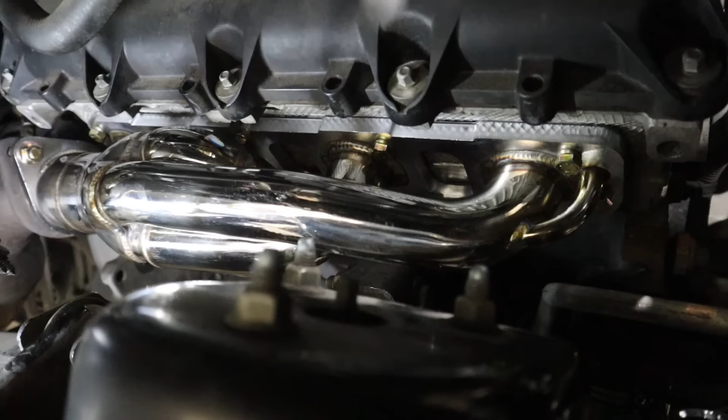In our last episode you saw that I took care of the exhaust leaks these vehicles have by installing a set of aftermarket shorty headers. In this episode, as you already saw in the thumbnail, we're installing a high volume oil pump and we're going to be doing an MDS delete.

Something that's kind of crazy to me is that it's been over 4 years since I first made a video about adding a high volume pump to a Hemi engine to help with these lifter issues. Since then, I've made a number of other videos doing as much research as I can, giving you guys accurate and up-to-date information about why I think this is a beneficial modification. It feels like it's come full circle—most people out there have heard of this as a mod to do for their engine.

One of the most hilarious things to me is that oftentimes on my own videos, I'll get people commenting and telling me, hey, you need to add a high volume pump to that Hemi engine. I think it's kind of funny how that works.

If you want much more detailed information on why I feel these high volume oil pumps are a beneficial modification to make to your Hemi, go ahead and watch the video I'll link in the description down below. It'll explain it much more clearly.

As a quick primer, I realized a number of years ago that a lot of these vehicles I was doing cam and lifter repairs on had extended idle times—fleet type vehicles or police vehicles where they're just sitting idling all the time. The way the oil pumps work on these engines, the least oil flow you're going to get through the engine is at idle. So you spend a bunch of time there, and it seemed like it was really affecting these vehicles.

So my thought process was, hey, if we can force some additional oil flow through the engine at idle, that can be nothing but beneficial. That was kind of the basis for that. But again, watch that other video if you want much more information about it.

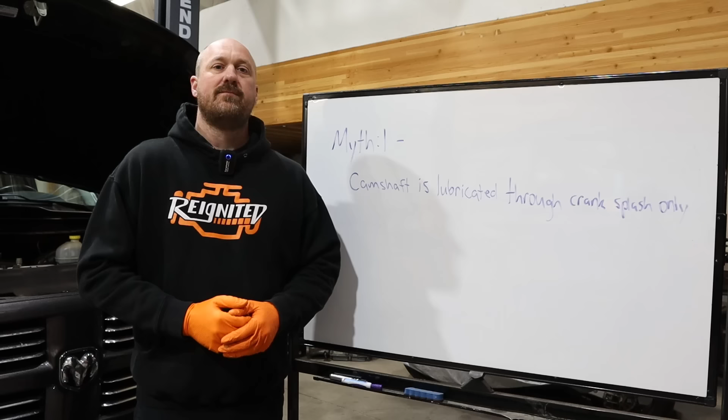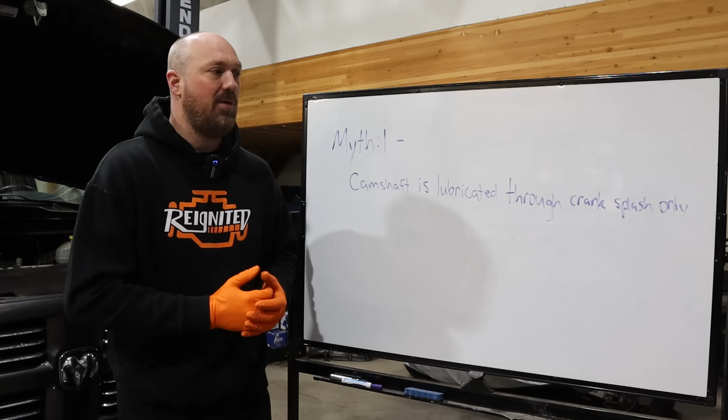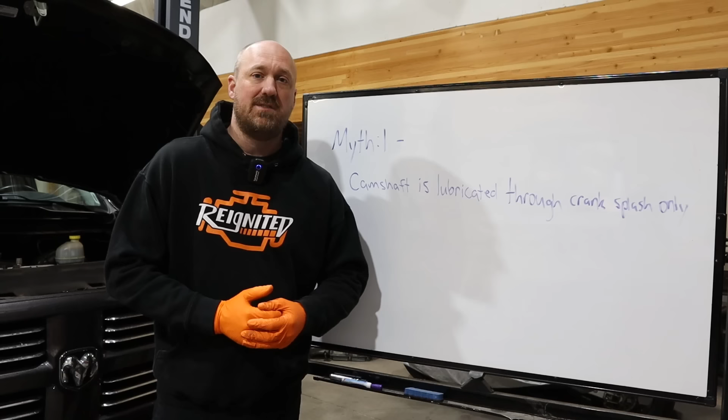Quickly I want to cover just a few common misconceptions or myths about this system. Myth number one: the camshaft is lubricated through crank splash only. That was a common one going around for a while, and that is absolutely not true. The Gen-3 Hemi engine has drilled oil passageways that provide pressurized oil directly to the lifter bores and thus to the cam lobes themselves. It is not reliant on crank splash.

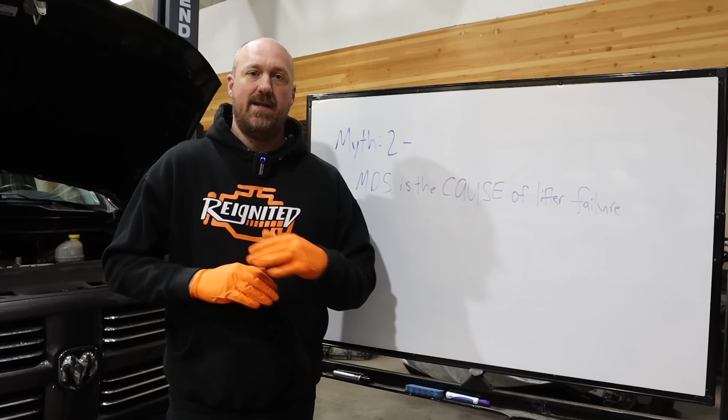Myth number two: MDS is the cause of lifter failure. I'm on record in multiple videos saying I do not believe this is true, even a little bit. A lot of people are convinced this is the case, saying it's always the MDS lifters that are failing. Number one, that is not true—my research has not borne that out. Number two, even on manual transmission vehicles, even my own that didn't have MDS at all, they were still experiencing lifter failure. So MDS, guys, is not the cause of this lifter failure.

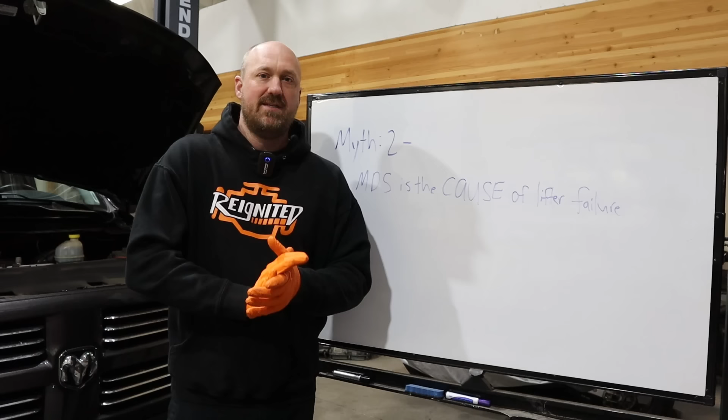That's why I say it's not critical that you delete the MDS in your vehicle, but it is appropriate in certain scenarios, like we're going to talk about later with this vehicle.

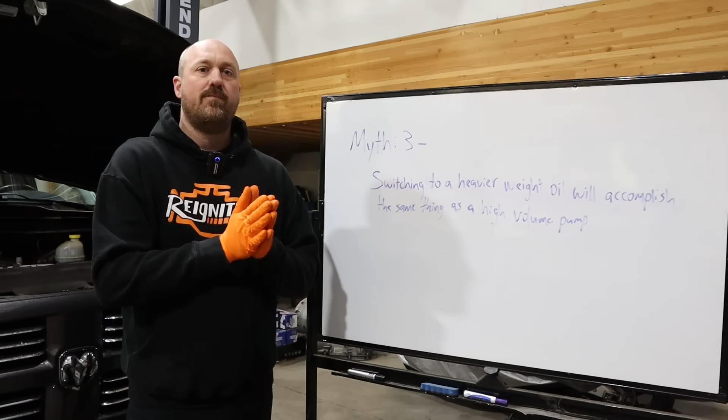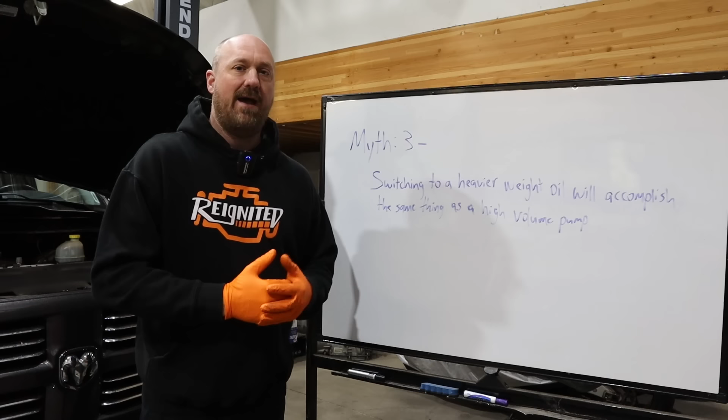Myth number three: people will tell me that switching to a heavier weight oil accomplishes the same thing as putting on a high volume pump because your pressure goes up. To understand why this is a myth, we need to understand what we're actually trying to accomplish. The pressure number increasing is simply a byproduct of the high volume pump—it's not what we're actually after. Pressure is simply a reflection of resistance to flow.

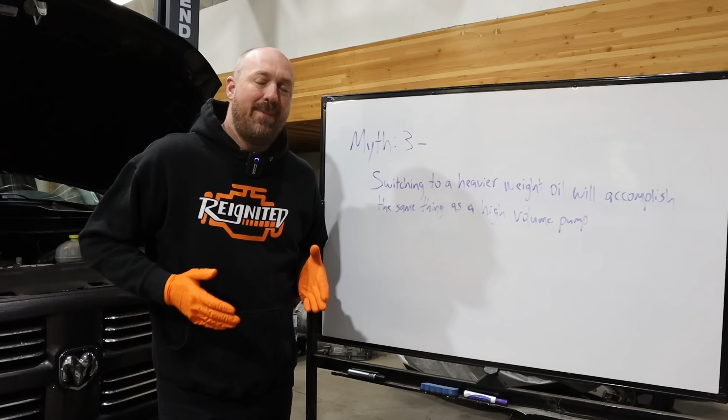Obviously, if you have oil in a system and then you put in heavier weight oil, that's going to make it harder for that oil to move through the system and the pressure number is going to be higher. But you fundamentally change nothing about the actual amount of oil moving through the system. Whereas if we stick with the factory recommended viscosity but we're adding more volume, the pressure goes up because we're forcing more of that oil through the system.

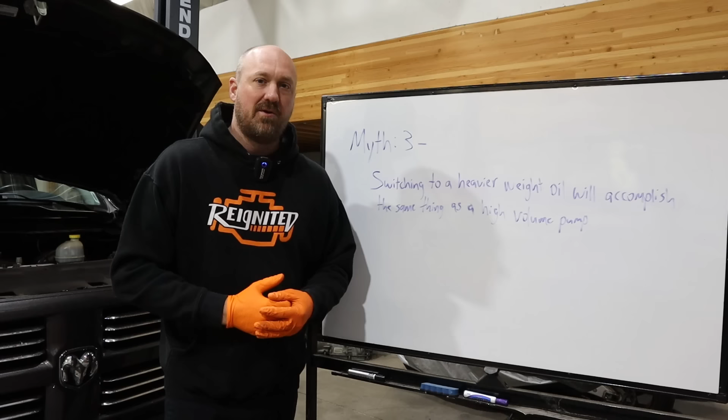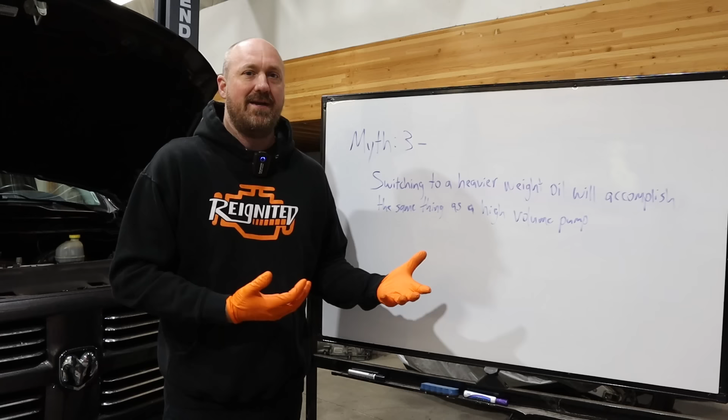So a lot of times people will say, well, I put this heavier weight oil in there and the oil pressure number goes up, but it's a placebo effect. You feel better because you think there's more oil pressure, but in reality you just put thicker oil in there. You didn't change anything about how the system works. So that's myth number three.

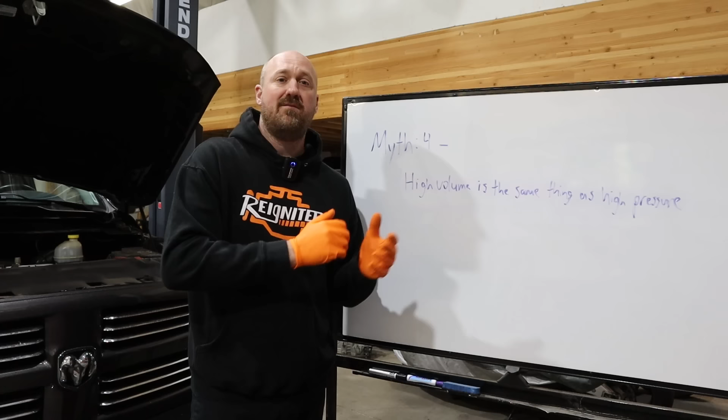Myth number four, high volume is the same thing as high pressure when it comes to oil pumps. This is absolutely not true. This is more of a clarification for a lot of people who tend to get these two terms confused with each other, and I just want to make sure it's crystal clear what the difference is between high volume and high pressure.

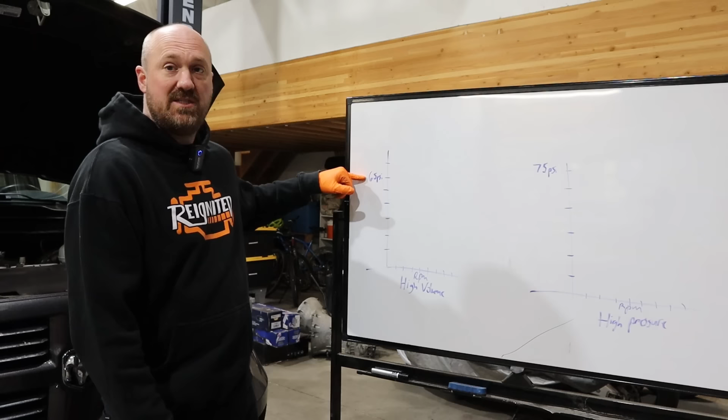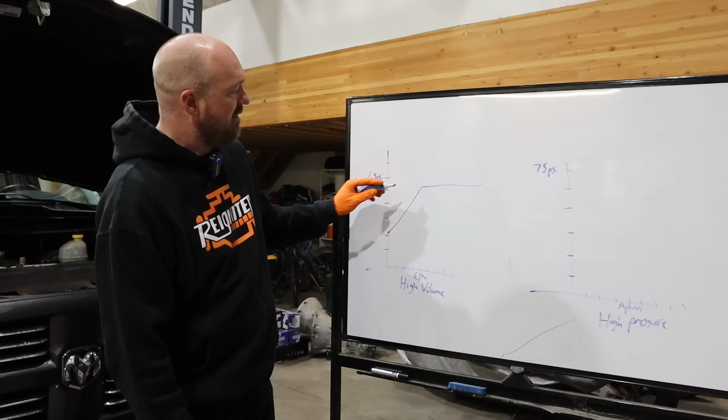To explain more clearly the difference between the two, on our left here we have a high volume pump. Notice the oil pressure release spring is at 65 psi. However, because it is a high volume pump, we're going to be forcing more of that oil through the system. Even at idle we're going to start a little bit higher than a stock pump would, and then as RPM builds we're going to go up to the 65 psi and then it'll basically just flatline across there. Now by contrast, a high pressure pump over here, it's the same volume as a standard pump is.

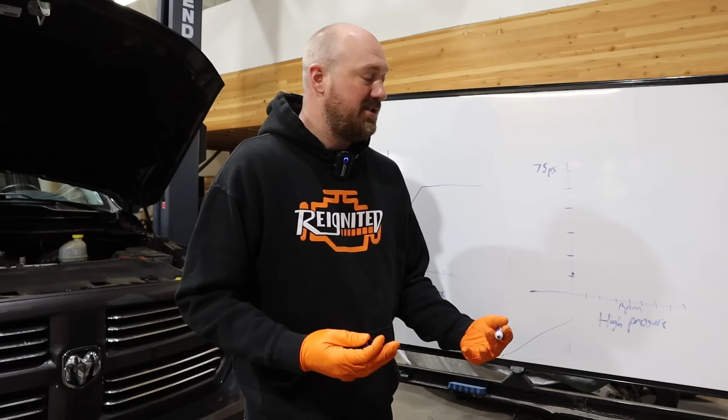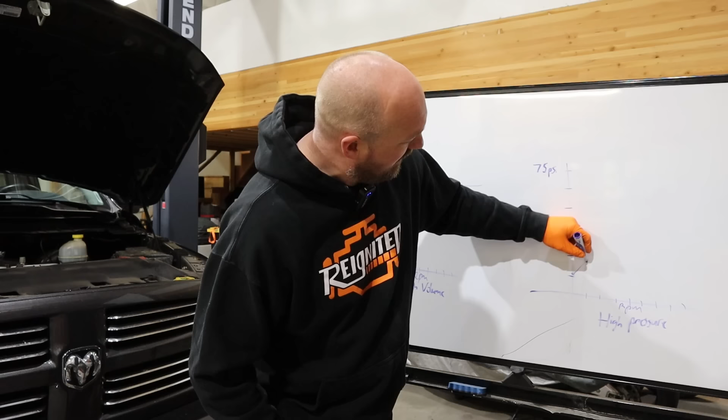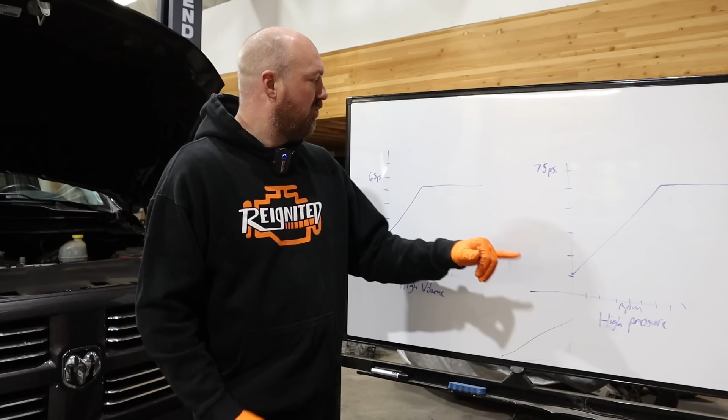So it's actually going to be generating less oil pressure down here at idle, which is the opposite of what we're actually looking for. But because it has a higher release spring in it, it'll generate more pressure over time. It'll go all the way up to 75 psi and then taper off from there, which is great. It's nice to have a little bit of extra oil pressure here up top, but we don't actually need that. That's not important. We're making plenty of oil pressure over here with the factory release spring.

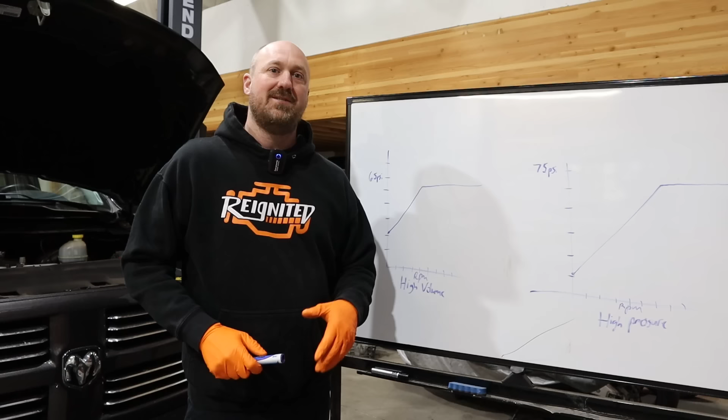That was never our concern. Our concern was with the idle oil pressure. Well, again, to clarify, our idle oil flow - the pressure is just a byproduct of that. So you can see the difference. A high pressure pump does not give us what we're actually looking for. The high volume pump does.

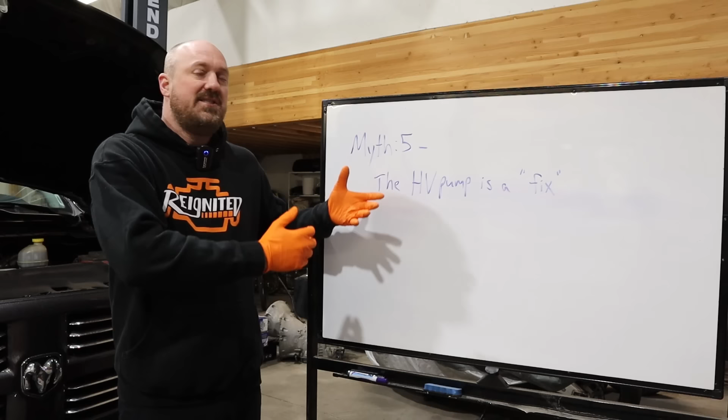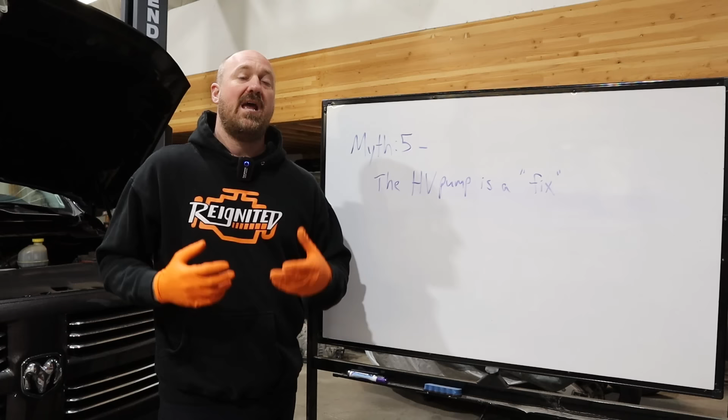Our last myth, myth number five, the high volume oil pump is a fix. Now I say this is a myth because this is simply a preventative measure. It's something we can do to help the situation. The pump absolutely will not correct a vehicle that is already experiencing lifter failure or anything like that. This is just a preventative measure. It's something I feel like can help these vehicles perform long term.

All right, classroom session is over. Let's get into the meat and potatoes of actually installing this pump and the MDS delete system. First thing we're going to do is disconnect the battery. Then I'm going to take the intake air box out along with this intake tube here.

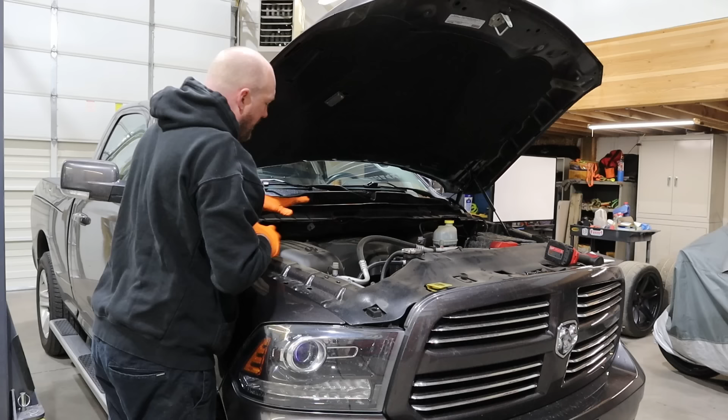I'm going to pull this upper panel here and pull the grill shell off just to give us some more access to the front area. Now the air box itself, it just lifts out of here - there's no actual fasteners that hold it in place. Just like that. This upper panel here is just held in place with a series of Christmas tree style clips, so a little trim tool here and pop these guys out. This guy comes right off.

Now note that if you guys are just installing the pump alone on your vehicle, you won't have to actually remove the radiator or anything like that from the vehicle. Because I am doing the MDS delete and I'm replacing that camshaft, I need that room to actually get the cam out of the engine, so I will need to remove the radiator. You certainly will not have to remove the grill or anything like that. I'm doing that in my case because I want to be able to video right through the core support to show you guys more clearly what it is that I'm doing, instead of trying to shove the camera down over the top.

So just recognize that if you are doing this job, you won't have to do that part of it. If you are just doing a pump install, you do not have to discharge your AC system. What you can do is unbolt the AC compressor and lay it to the side. It's a little bit of a pain because these lines are constantly in your way, so if possible, I recommend discharging the AC so you can remove these lines. It makes things a lot easier to work in the engine bay, but it's not a necessary process.

Now is a good time to go ahead and drain your radiator. There's a petcock down at the very bottom, tough to see down in there. There we go, that guy right in the dead center. You unscrew that - don't take it all the way out, just unscrew it until it starts pouring coolant out, and drain that radiator.

Next up, we're going to remove the upper radiator hose and then the cooling fan. To do that, we're going to use this special tool, an air hammer with a special attachment that'll hook onto the nut for the fan and knock it free. I absolutely love that tool, it's one of my favorites. You do not have to have these specialized tools - there are wrenches you can buy that do the same thing, they're still a big pain, but having a specialized tool like this makes it so much easier. I'll put that link both here and in the description down below.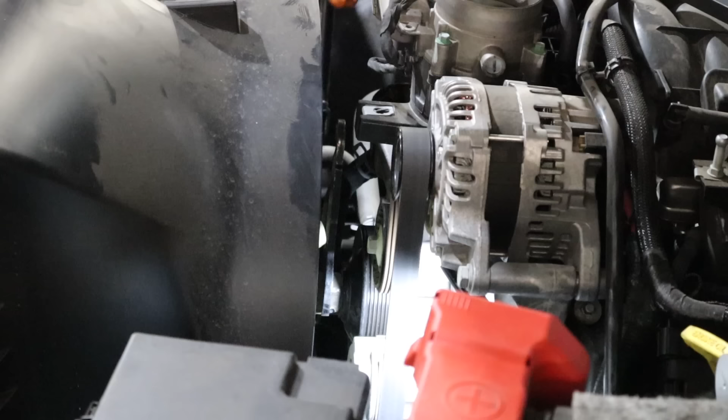All right, I've already removed the AC lines here, so hopefully that gives you guys a better view of what's happening. I've got our tool on here. Now this is a left-hand thread, so we want to go ahead and knock it clockwise to actually loosen it.

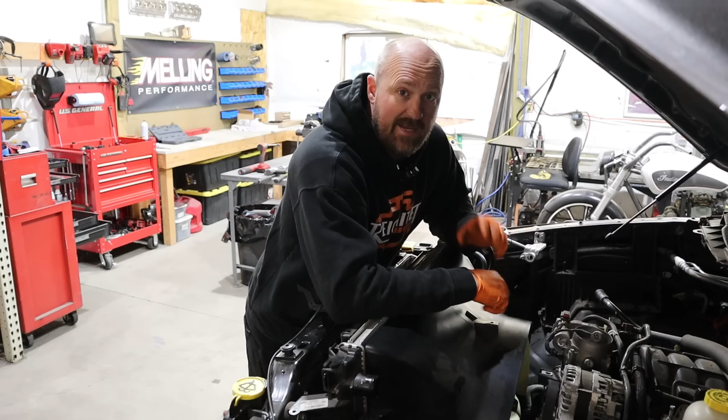I'll tell you, just getting the fan loose can be one of the most frustrating parts of the entire job, so just kind of keep your cool until you finally get that thing to pop free. Then you'll basically just spin it free, and it'll just kind of sit down in there. Next we're going to remove the actual shroud itself, and that'll allow that fan to drop out of there.

An important note about these viscous fan clutches is that you don't want to leave them lying flat. You want to keep them upright because that viscous fluid in there can drain into different portions, and apparently it can cause it not to work correctly anymore. So you don't want to ruin your fan clutch - just store it in an upright position before you go to reinstall it.

Sometimes I have people on my videos saying, well of course it's easy for you, you've got the lift there. And I always tell people that the lift does not change the amount of work that's involved - it's still the exact same amount of work. What the lift does is it's easier on your body. And seeing as how I just had 2 discs replaced in my neck last year, I make no apologies for using a lift now.

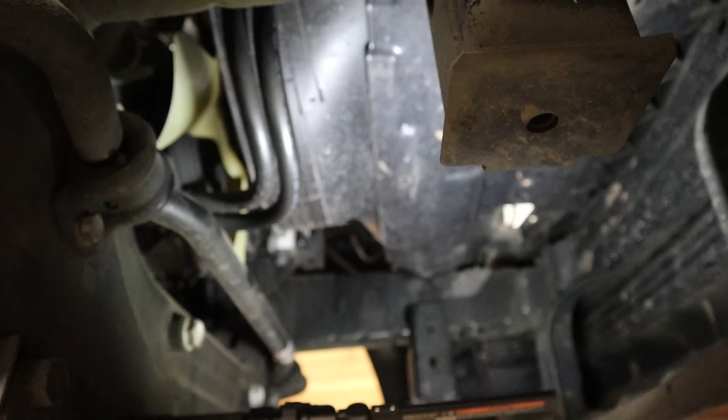Okay, from underneath here, there's a couple of different things we need to do. There's a couple of push pins, one here and one here, that we need to disconnect, and then this lower part of the shroud will disconnect from the main part. There's a couple of clips here and here - just use a little pry tool to force that forward, and then this whole section here will leverage out and down. That way we can get the whole shroud out of there along with our viscous fan.

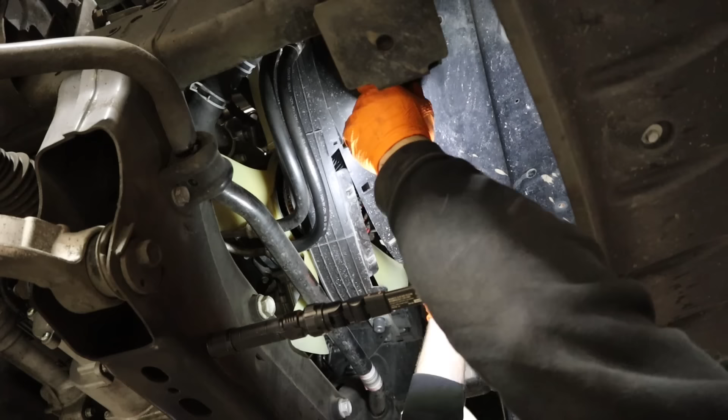Now, I did things in this order because that's how I'm used to doing it. However, you could just as easily do it the other way around. What I mean is that lower panel that pops off the shroud - after you take that off, that allows you to pull the upper shroud without actually removing the viscous fan first, so you have more access to the fan afterwards. For my sake, I'm just used to doing it the other way, so that's the way I did it, but for you guys, it probably makes more sense to go ahead and pull the shroud first and then remove the viscous fan.

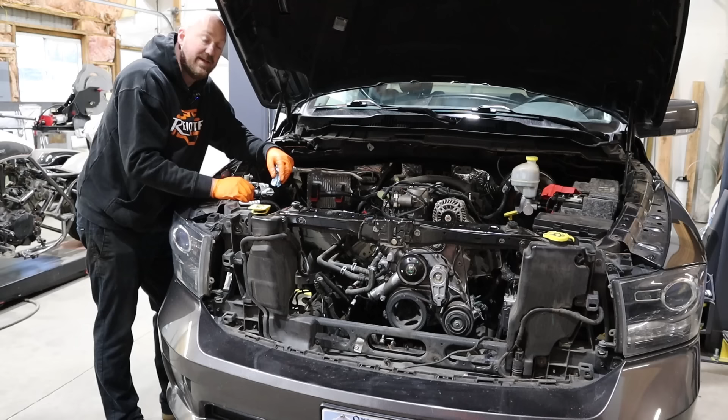Now that we've got that radiator out of here and all those coolers, you'll be able to see very clearly exactly what it is that we're doing. Again, if you're not doing the MDS delete and just doing the pump, you won't need to take all this stuff out of there. I'm mostly doing it for visual purposes.

Now we're going to go ahead and try to get our timing cover off of here. So we're going to take off the serpentine belt, the idler pulley, the alternator, the tensioner, the AC compressor, and our crank pulley. Let's get into it.

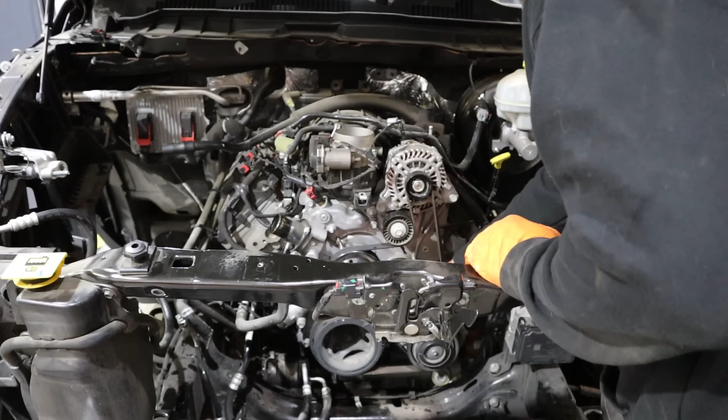Note that when you're removing the AC compressor, if you're just leaving the system charged and laying it to the side so you can get the timing cover off, there's actually a stud right here that holds it to the timing cover rather than just a bolt. So you'll have to remove this stud. This is an E-torx end on there, so you'll use the E-torx to unscrew the stud from the timing cover, and then you can just lay that AC compressor to the side.

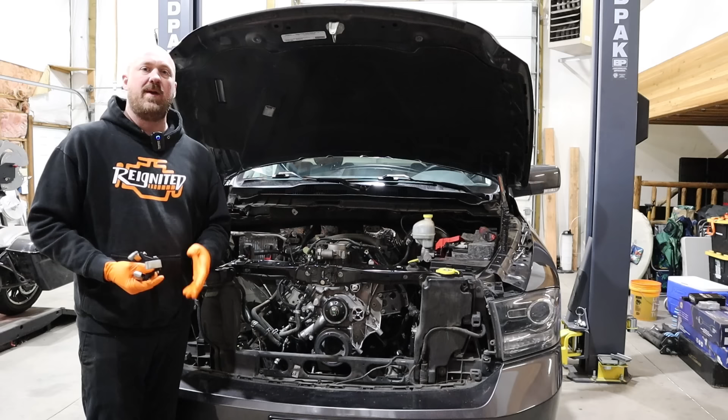Our next step is to pull the crank pulley off of there. Now this is where we need another one of our special tools. Unfortunately, a regular 3-jaw puller will not work on the Hemi engines. There's just not a whole lot of room in there to come and grab it. So there are specific pullers meant for the Hemi engine. Again, I'll link it both here and in the description down below.

Now we can remove the timing cover itself. There's a series of bolts on the outer edge of the actual timing cover, and there's also 5 bolts that hold it from the underside, going from the oil pan up into the timing cover. So don't forget those.

Now, an important thing to remember is that you do not have to actually remove the water pump from the timing cover. You can take it with the timing cover, which is nice because then you don't have to replace the gasket or seal for the water pump. So to do that, basically you do this top bolt here, and then every second bolt is the one that goes through into the block itself. So you go this one, this one, this one, and so on around the perimeter, and then the whole timing cover comes off with the water pump still attached.

A couple of things I want to bring to your attention here. You'll have some longer bolts right here - this one's 15 millimeter, and this one is also very long as well. All the rest are going to be 13 millimeter, and significantly shorter in length. So keep an eye on which ones go where, so when you put it back together you won't have any confusion. Also, there's a tie strap here that connects from the cylinder head to the timing cover. You'll have to unbolt this little tie bar as well.

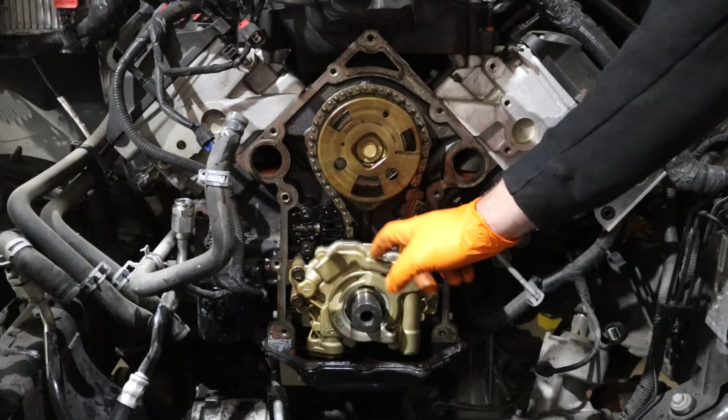And there it is - here is your oil pump all exposed and ready to be swapped out. And you might think to yourself, well, that wasn't so bad, except for one thing. Now, if this were a Charger, a Challenger, or a 300, this is as far as we would need to go, because basically all you have to do to change the pump at this point is remove those 4 bolts that hold the pump on in the front. You can then swivel the pump enough to access the oil pickup tube and get that bolt out of there.

It's still a little tight, but you can easily do it. And then the pickup tube just lays there in the oil pan - put a new pump on, put everything all back together again. Unfortunately, because of the truck's rear sump design, the oil pickup tube runs across the bottom of the engine and is bolted in 2 different places. What this means is that we actually have to remove the oil pan to do the oil pump on these trucks.

Now, I have had a couple of people contact me and say, hey, if you just bend the lip of the oil pan down far enough, you can access that bolt and swap it out. And while that's probably true, that's a little bit too sketchy for me. I'm here trying to show you guys the correct way to do this job, so that's what we're going to do. I do want to point out as well that if you have an SRT Charger or Challenger, you will also have to pull the oil pan off, because that pickup tube is held in 2 different places.

Pulling the pan on this thing is not super fun. You do actually have to lower the front differential down a little bit on the 4-wheel drive models to gain enough clearance to get that pan out of there. But I don't think it's especially that much more work, so let's get into it.

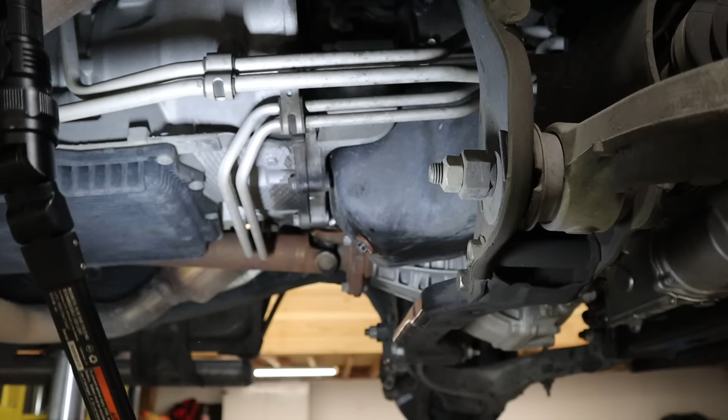First step, we're gonna remove this little plate right here. There are 2 bolts that go up, and then there's this one, this one, this one, and then this one, and 2 bolts that go up again to get this plate out of here.

Next thing we want to do is get this lower cross member out of the way. There's just these 2 bolts here, 2 bolts here, and this thing will drop right out of the way.

Next step, we're gonna take out all the bolts that are actually holding this front differential in place. We're not gonna drop the whole thing out of the vehicle. We just want to let it droop down far enough out of the way so we can get this oil pan out.

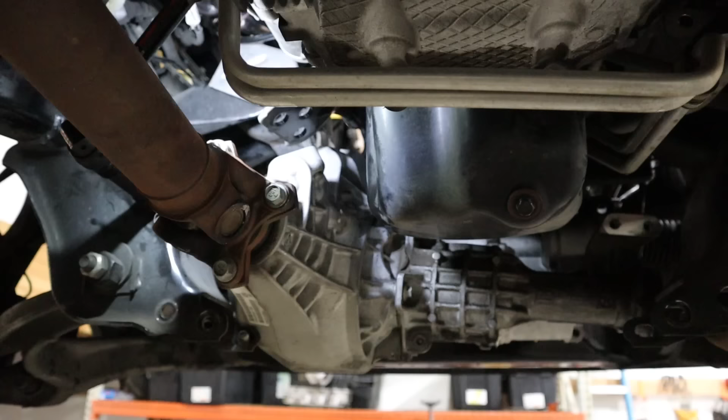All right, we've got our front differential lowered out of the way. You can see just how much that drops it down, and really gives us, it's kind of hard to tell from here, but it really does give us a lot more room to get this pan out of here. So feel pretty confident about that.

Service information says we also need to raise the engine to actually get this out of here. So hopefully just lowering this will be enough. We'll see if we can't wiggle this thing out of here.

I do feel like I need to warn you guys that all of the bolts that they use to actually hold this front differential in place, they use Loctite on all of them. So they're all very, very tight. Kind of a tight squeeze to get those things out of there. Just stay patient, you'll get them.

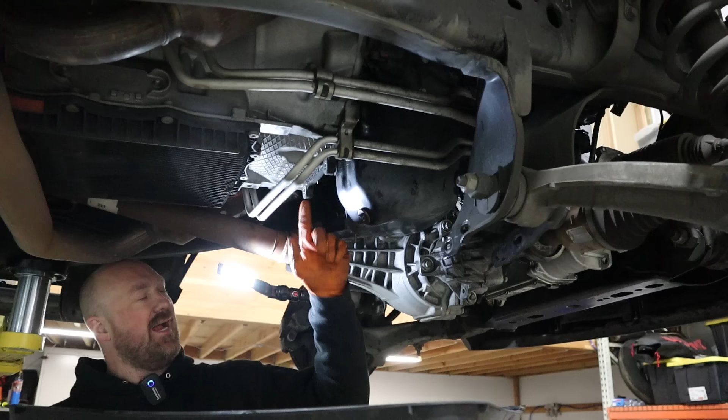Something else I always mention when doing this kind of job, I will wait to drain the oil until after you pull that front timing cover off. The reason is because a lot of that coolant will then pour down into the oil pan. And if you've already drained the oil, that coolant can kind of hide in different areas. But as it is right now, the coolant will have dropped below the level of the oil itself. So once I pull this drain plug, the oil will force all of that coolant out, and you'll be left with nothing but oil in the oil pan.

Now, not a big deal in this case because we are actually removing the oil pan entirely. I could go ahead and clean that. But as a general rule, if I'm pulling a timing cover, I will wait to drain the oil until after I've done that.

There we go. Not very much in there, but still good practice.

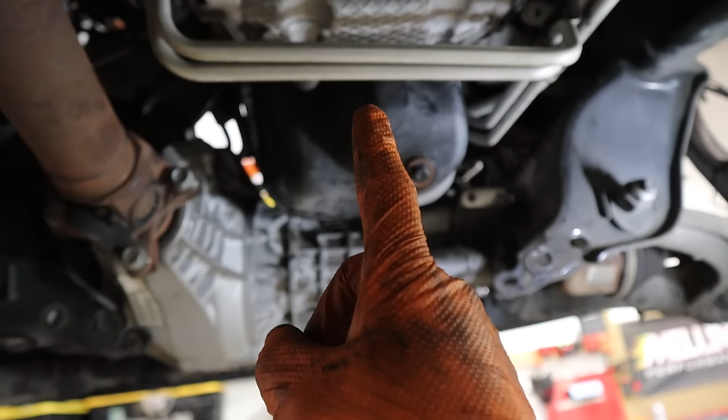Okay, I just got all of the fasteners out of the oil pan. The only thing you need to realize here is that there's a lot of bolts and there's a couple of studs. The studs are important because that's where some of your wiring clips onto. So make note of where the studs are located in the pan before you take them out.

There we go. Will we get lucky and be able to snake this thing out of here? That is the question. Ooh, it's gonna be close. I don't know if we're gonna get so lucky. We may end up having to raise the engine a little bit.

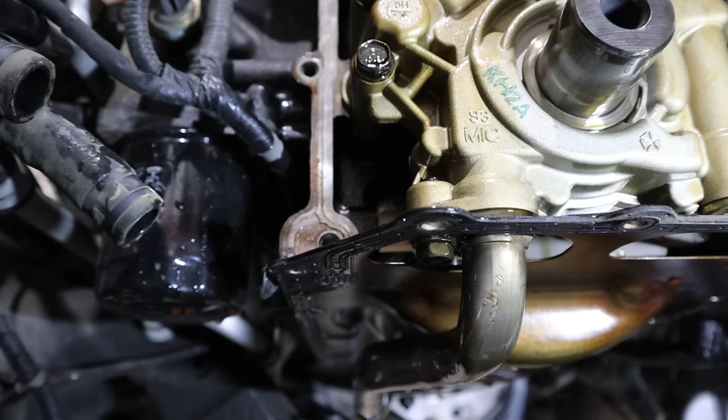All right. Okay, now you can clearly see our bolt that we need to remove for the oil pickup tube. I will warn you that as soon as you break this free, there's a bunch of trapped oil inside this tube that's gonna drain absolutely everywhere, so be prepared for that.

Okay, after all that, all we have to do now is take off these 4 13mm bolts, and this pump pops right off, and we can put our new one right into place.

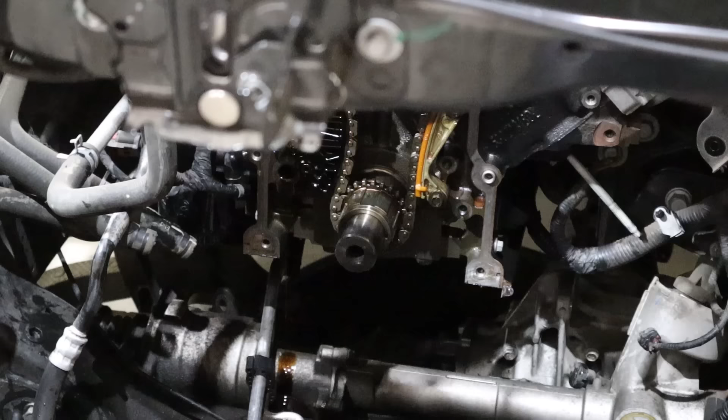Now, externally, you'd be hard-pressed to notice a difference between these two pumps. How are you supposed to know whether this one's a high-volume pump or not? Well, even though externally they look the same, internally is where they differ.

The factory pump has a 14mm wide rotor, a little gear rotor that spins in there. This one, the high-volume one, has a 16mm wide rotor, same as the Hellcat pumps. That's what gives it that same capacity, and that means the external dimensions can be identical.

So it's a direct swap onto a 5.7 or a 6.4 engine. If you're just installing the pump on your vehicle, good news, this is as far as you need to go. Now you can just start the reassembly process. A quick note, there's no gasket or seal between the pump and the block, so go ahead and just bolt it directly right back up.

When you're putting the pickup tube back in, I highly recommend installing a new pickup tube O-ring. Make sure you're oiling up that new O-ring so it doesn't get cut or pinched. It's far too simple to overlook this easy step. Just make sure it's nicely lubed up so it bolts up properly and you don't have any issues. I've heard from a few people who did this high volume pump install and ended up with less oil pressure than when they started because they pinched that O-ring. So definitely be careful about that.

However, for us, we're going to go ahead and continue on with the MDS delete, which means I need to get these cylinder heads off because we've got to get those MDS lifters out of there. Now, I'm sure some of you are asking, if you're so adamant that the MDS system isn't actually causing these lifter failures, why are you deleting it on your vehicle?

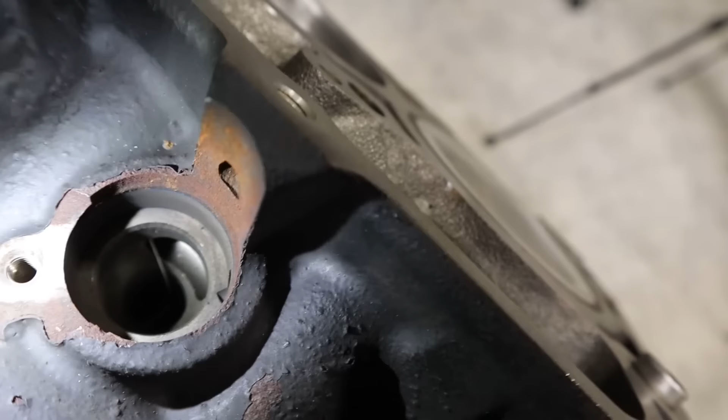I realized while editing this video that I never got a good shot for you guys of those oil passageways. So here are some clips from previous videos I've done, really showing you guys basically where the MDS solenoids connect from the top of the block, you can see how those connect in with these specific oil passageways that feed those lifter bores. So you can clearly see how this system applies pressurized oil to those lifters.

Now that the lifters are out of the engine, the last item to come out is the camshaft, so we actually need to time the engine first before we pull that cam out. Let's get started. Generally, I like to time the engine before I actually remove the old camshaft. The reason for that is because now you know your crankshaft is in the correct position and you don't have to mess with it after that.

Now realistically, in this scenario, it's not that important because with the oil pump removed, you can actually see the timing mark on the crank gear, so no matter what, you could handle the timing. But in other scenarios, you oftentimes will not have the oil pump removed and you cannot see that lower timing mark at all.

So if you time the engine first, you know your crank is in time and you don't have to worry about it after that. One of the nice things here is that this is our #1 cylinder, and we know our #1 piston will be at top dead center when this thing's in time.

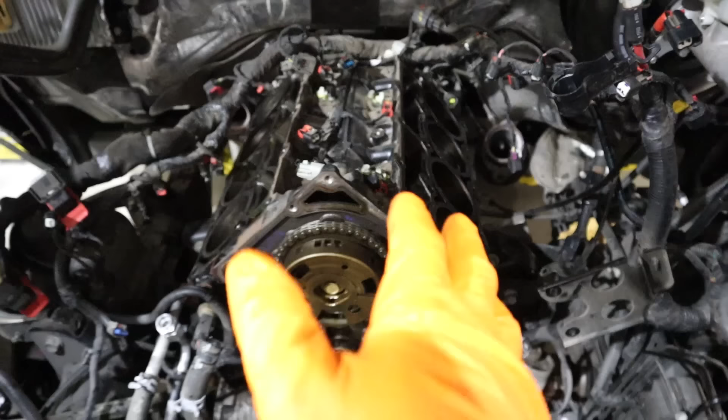So you want to look for two things here. First, that this piston will be in the full up position, but also on the camshaft sprocket, there's going to be a vertical line embossed in that sprocket. When that vertical line is exactly at 12 o'clock, that's when you are in time. So let's go ahead and get this thing lined up and I'll show you that mark.

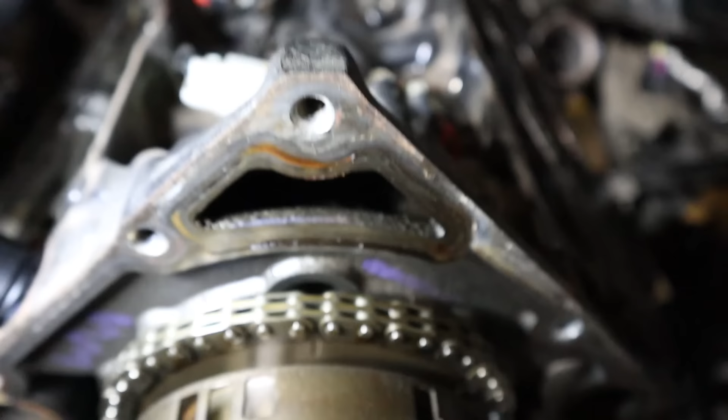Okay, easy enough, let me see if I can get you to see that. There you go, see that vertical line right there? We are directly at the 12 o'clock position, and our #1 piston is at TDC. So we know that this thing is in time.

Next thing we want to do is go ahead and pin this tensioner back. Now this is just spring loaded, so it's very easy to push it back. There's a hole right here that once we push it back, it'll line up with this hole and we can stick a pin through there and pin this tensioner in place. And then we can actually remove the tensioner entirely.

There we go. Next, we'll be removing the cam sprocket gear.

And finally, we have the cam thrust plate here. Now these are T30 Torx that are countersunk in here. You pull out these 4 bolts, this plate pops off, and the cam will just slide right on out of there.

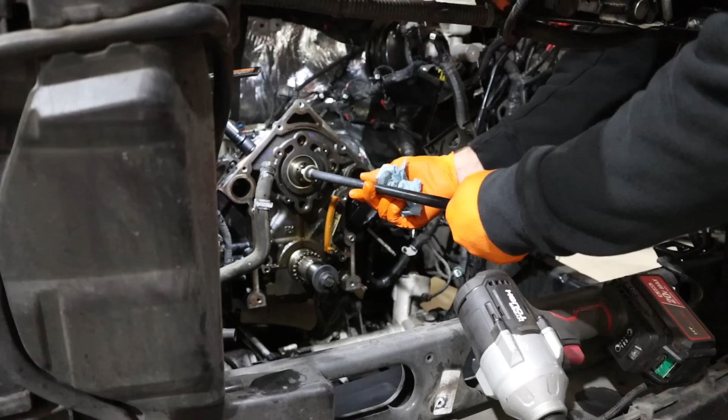Now I've made this special tool to help pull this camshaft out. You don't need anything like this. Generally, I'll just take the cam sprocket bolt, stick it in there a little bit, and you can leverage enough off of that to actually get the cam to come out.

When you are coming out, try to be careful. Obviously you're going to be touching the cam bearings in there. Don't want to be slamming it into those bearings as you come out, but also just be slow and gentle with it. You'll be fine.

And there it is, camshaft out. All right, you guys, come take a look at this. I found something that I think is very interesting and I think you guys should see.

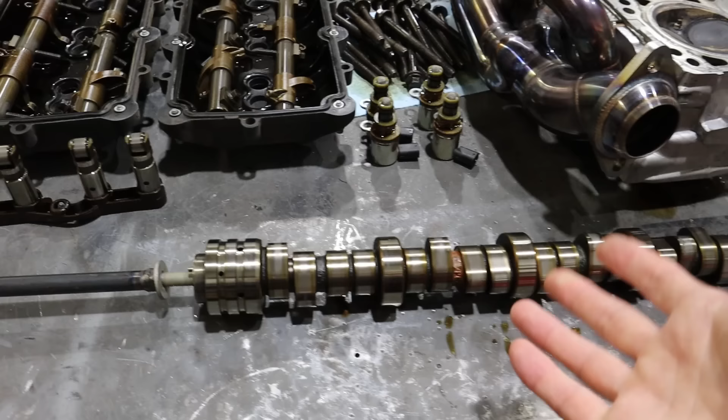So it's been my contention for a number of years now that I don't believe the problem is actually with the lifters themselves. I think it's an issue with the camshaft hardening of the lobes, because it seems like the lobes are failing first, and that's what's causing the lifter roller to fail. So take a close look here.

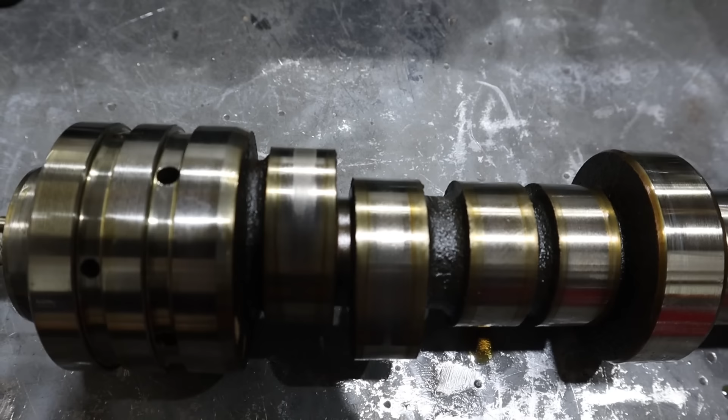Now again, this truck has, I believe, 85,000 miles on it essentially at this point. Take a look at these cam lobes, look at the wear you're seeing right on the face of them. I'm trying to get a better shot here. So definitely seeing quite a bit of wear there on the lobes.

Not crazy though, right? But look here at cylinder number 7. See the pitting? Look at that pitting that's happening there to that cam lobe. And that's happening as well on cylinder number 6, not as bad, but definitely still there.

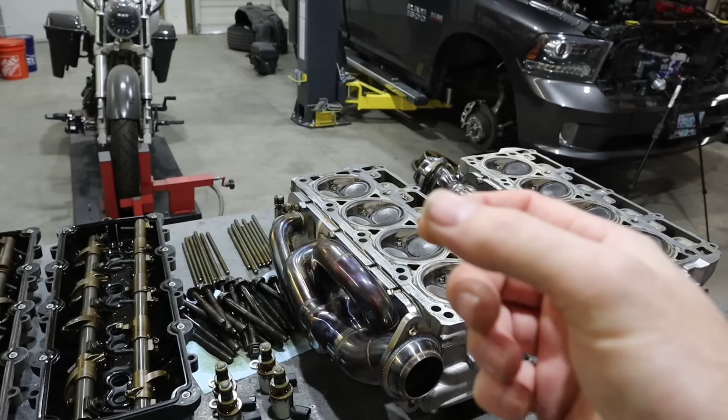But absolutely fascinating. Again, this is just furthering my thought that it's the cam that's the problem, not the lifters. Because in my case, the lifters had not actually failed yet. Yes, they showed a lot of wear, but there was no play in those needle bearings. They were not jumping up and down, flattening, nothing like that. But you can clearly see the cam is starting to go first.

All right, I've got the new Melling cam all lubed up with some engine assembly lube. Let's get it stuck in there.

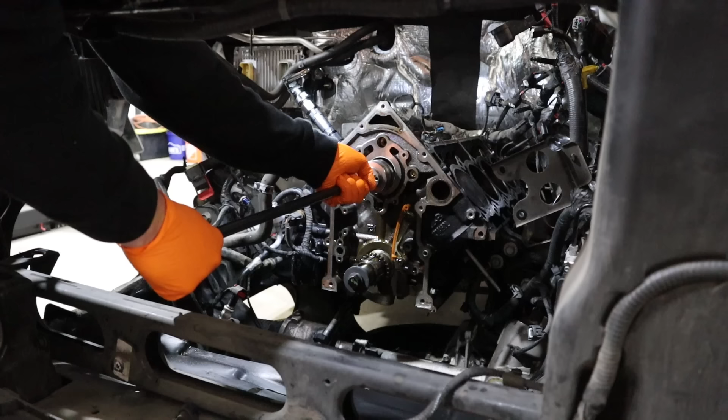There we go. Now, as a reference, the dowel pin in the end of the camshaft here needs to be at the 12 o'clock position.

All right, let's talk about making sure your timing is correct as you're going back together again. The great thing is that the Hemi engine is a very, very simple engine to time. There's only 2 things you need to worry about: that the crank timing gear is at the 6 o'clock position, and that the cam sprocket mark is at the 12 o'clock position, directly opposite from each other.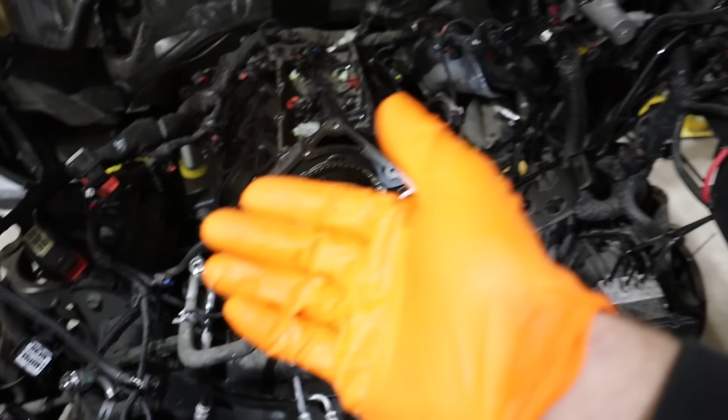That's literally it. Now, the timing chain on these engines does actually have a couple of marks on it to help you line everything up. But I'll say this, the marks in the chain are largely irrelevant. You don't have to line those up if you want. All that matters is that cam mark and the crank mark.

However, just for you guys, I went ahead and lined up the marks in the chain, so I'll show you those now. The one on the crank can be very difficult to see, there's just a really small dot there.

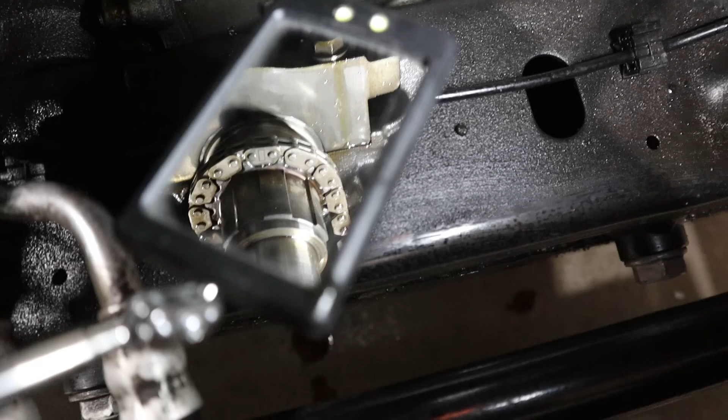You can see a single line on the chain that follows that mark. In contrast, on the cam mark, you can see that vertical line on the cam sprocket, bracketed on either side by the marks on the chain itself. So now we know for a fact that our cam sprocket is in time and our crank sprocket is in time.

This engine's in time. So I went ahead and put the tensioner back in there. All I have to do is pull out the pin that we put in there. There we go, now it is tensioned. Now the last thing I need to do is go ahead and torque down the cam sprocket bolt.

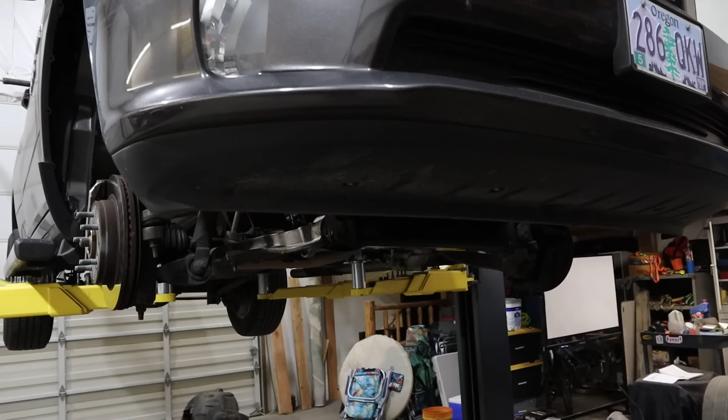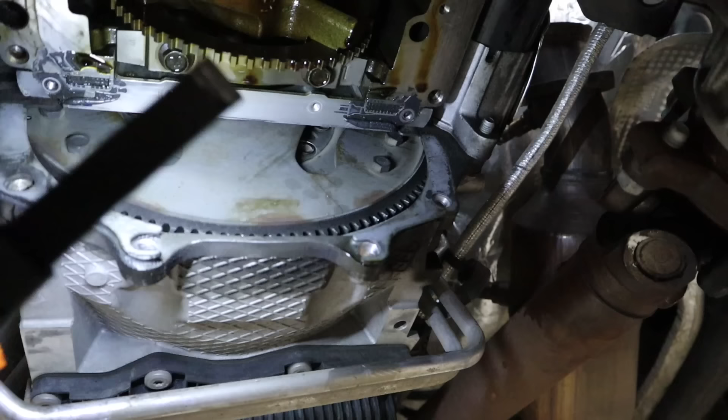One of the most common questions I get is, how do I hold the engine in place so I can torque down that cam sprocket bolt without the engine turning over? Well, it's pretty simple. Basically, you just gain access to your flex plate right here and stick a screwdriver or something in there to keep the flex plate from rotating while you're torquing that bolt down. Just don't forget to actually pull that screwdriver back out.

Now, after you've got your cam sprocket bolt torqued properly, go ahead and spin the engine over a couple of times until that cam sprocket mark is once again at the 12 o'clock position, and then verify that your number 1 piston is at top dead center once again. If you do that, you can basically be assured that you are in time.

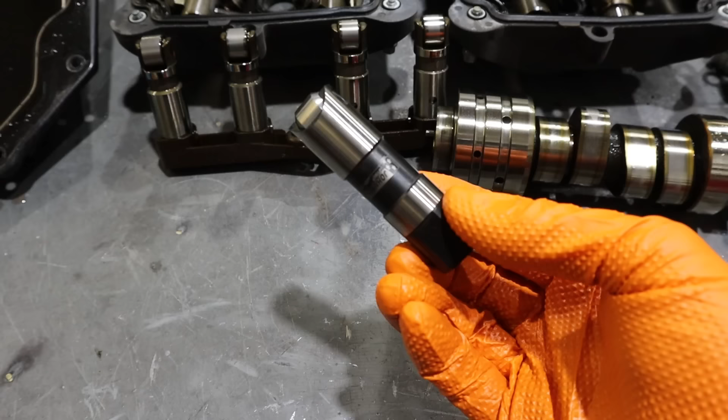All right, let's take a closer look at our new Johnson lifters versus the factory ones. As you would expect, these are very, very nice quality lifters, very well put together. Interestingly, the actual roller area is narrower on the Johnson lifter versus the factory one. It's kind of an interesting point there.

Not exactly sure why that is, but still, a very nice piece. One thing I will mention is that these are completely dry, whereas the factory ones, when you receive them new, are kind of pre-oiled to some extent. So these ones I'll probably be dumping in some oil first to let them sit. No matter what, I guarantee you the lifters are going to rattle on first startup, so don't let that freak you out. They'll rattle pretty severely for the first few seconds, then quiet down as soon as that pressurized oil really starts to pump them up.

One other piece of advice here, and I cannot stress this enough: please, please, please do not buy cheap lifters from either Amazon or eBay. Yes, I know either the OEM lifters or these Johnson lifters probably are not the cheapest thing in the world, but you guys see how much work is involved with doing this job. Please do not put those cheap lifters in there.

I have heard countless stories of people who say, man, I put these new lifters in and they rattle and tick worse than the factory ones ever did, and they're brand new. That's just something we see with a lot of these aftermarket ones. They're just extraordinarily cheaply made, and they will rattle pretty good, and they'll tick, and they'll drive you up a wall. So please do not go cheap on the lifters. There's other areas where you can kind of cheap out a little bit. Don't do it on the lifters.

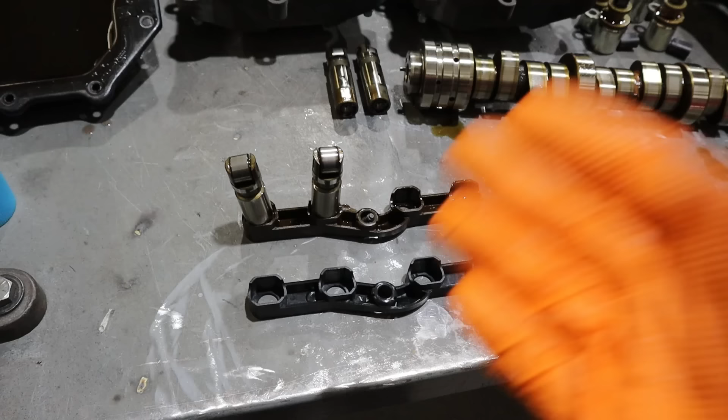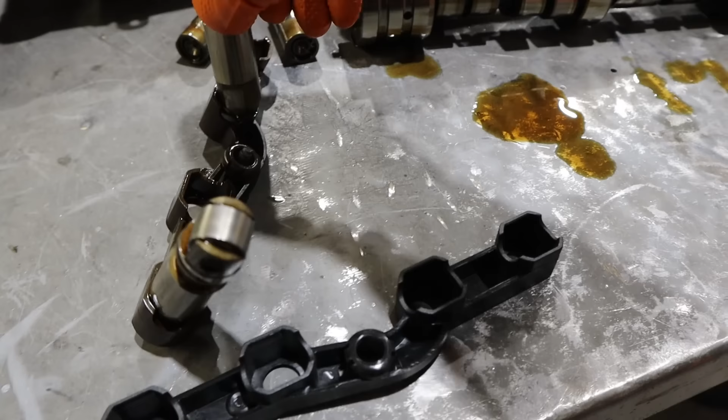Another important thing to note here is that if you are changing out your system to non-MDS lifters, you will have to buy new yokes that are non-MDS only. The reason for that is because the MDS lifters themselves have a wider base than the non-MDS ones do. So you can see that this lifter is nice and tight inside this yoke here. But if we take this non-MDS one and put it in the MDS side, it's not tight at all, and it just kind of rattles all over the place. So that doesn't work. We have to replace it with these non-MDS style yokes.

Fortunately, the Melling kit does come with the new ones. Now, another thing people are asking me all the time is how am I cleaning the surface of the cylinder head and the block to get it ready for reassembly?

Well, it's very simple. I'm basically using this little angle die grinder, and I use a red roll-lock disc on it. Now, a lot of people think, oh man, that's crazy, you're so aggressive, you're grinding grooves in this thing. I don't know what kind of Neanderthal you think I might be, but that's not how this works.

With the red roll-lock disc, you want to make sure to keep it flat to the surface, and you're not applying any pressure. You're just letting the disc do the work, and all you're doing is taking off that gasket residue here. You're not trying to get all the marks out of it. You don't want to be up on the edge grinding away like that.

No, we're just being very simple, very safe, and we're just cleaning the gasket residue. That's all. Yes, it will make a nice even surface here. I have never had even one problem with the cylinder head over the years that I've been doing it this way. Other people are more sensitive, and they want to sit there for 40 hours with a plastic scraper getting every last little mark. That's fine, you guys do it however you want to do it. You ask me how I do it, that's exactly how I do it, and I've been very successful with it.

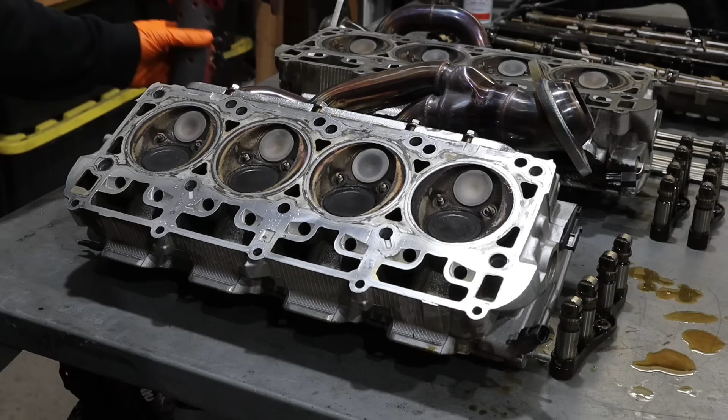Okay, giving you guys a closer shot here of what the surface looks like once I'm all done. Now, if you'll notice here, if I get in close, kind of tough to see, but you can see there's still some marks right there. You can kind of see the outline here. This is where you'll get yourself into trouble if you're trying to get all of that out.

That's a little bit of electrolysis happening here. It's eaten into the surface of the cylinder head. That's not a problem, it won't affect the way that this seals whatsoever. It's very, very minor markings. Again, all we were doing here is getting rid of that gasket residue. Now we have a nice, clean, even surface for the new head gasket to seal to properly. This cylinder head's ready to go back on.

Another question I get asked all the time is, because I have the cylinder heads off the vehicle, shouldn't I go ahead and send these out to a machine shop so I can do a little skim on the surface here, make sure it's nice and flat? And my answer to that is, unless you have reason to suspect that the cylinder head is warped or not flat in some way, it's generally not necessary.

Now, of course, certainly nothing wrong with that. If you decide to do that, absolutely more power to you. But in my experience, there's generally not cause to do that. However, if you want to check this for yourself at home, there's an easy way to do it.

You get this super technical tool called a straight edge. And what it is, a machine surface on one end of it. You'll basically lay it across the cylinder head surface here and check it at various points. Now, the specification on this is 2/1000ths. So essentially, you get some feeler gauges here with a 2/1000th feeler bit. You'll lay it across and then measure it at certain areas, see if that feeler gauge can fit underneath the straight edge and the surface of the cylinder head.

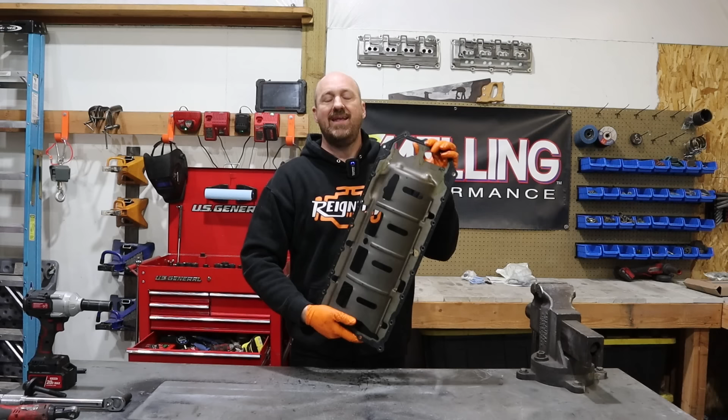Now that our oil pump's on there, we want to get that pickup tube back in place, but in order to do that we have to put on the oil pan gasket first and then the pickup tube. This pan gasket is obviously an integral windage tray type gasket. This goes on, then the pickup tube goes in place, then the oil pan after that.

Now, something I want to note here about these oil pan gaskets, they are actually very good sealing gaskets. We generally don't see problems with these leaking. Anytime I say that, people run to the comments and say, well, I had mine leak. Yeah, you're going to see a few out there, but by and large, this is not a common problem to have these leak.

As such, when you install these, you want to put a little bit of silicone in the corners here, basically right where that rear main seal matches up to the iron block and where the timing cover matches up to the iron block. Just in those four spots, you want to put a little bit of silicone. Do not put silicone all the way around the perimeter. Whoever ends up in there after you is going to absolutely hate you for doing that, and it's just not necessary. Like I said, these things seal really well.

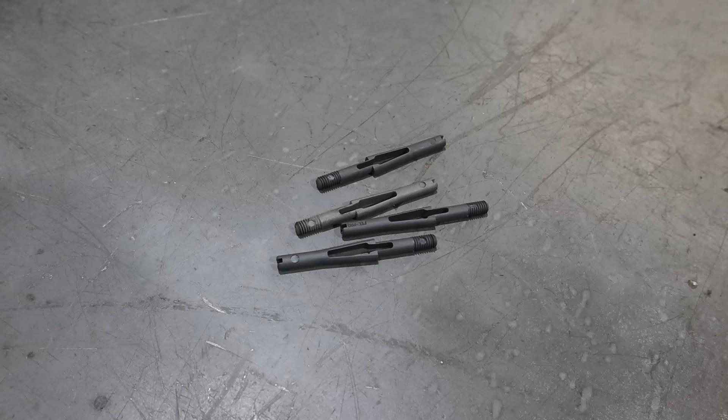Another point to note here is that when you're installing these, it can be kind of a pain because you put that silicone on there, then you're trying to fit this up into place, then you're trying to get the pickup tube in place and it's kind of flopping around. Something that I found really helpful is a set of these basically oil pan holders, and these actually come with a lot of different aftermarket oil pan installation kits. They're just little metal things that screw up into the block itself. What happens is they have this little wedge shape that as you slip the windage tray up over it, it kind of holds it in place for you. Then after everything's in place, you just unscrew them from the block and put the actual screws into place.

I'm not sure where exactly to find something like this. I'll see if I can locate that and put it in the description down below, but I find these to be a very helpful tool when doing this job. Also note that I have a fresh oil pickup tube O-ring installed and it's properly lubricated, so I don't have any concerns about that O-ring being pinched or cut as I install it.

Important thing to remember here while you're putting in the oil pan bolts, make sure to put all of them in first loosely before you try to tighten any of them. If you tighten some of them, chances are by the time you get to the last one, it won't want to go in, and if you try to force it, these things will break very easily. So start them all loosely first and then tighten from there.

And it's time to put our timing cover back on. As mentioned before, we're going to put just a little bit of RTV right here in the corner, and the same on the opposite side here. That's all you need to actually make sure this front timing cover is all sealed up.

Also, don't forget to install a new timing cover seal, because chances are by the time you take this off, yours will have been through about a million heat cycles and the rubber will become not so much like rubber anymore. It'll be hard and stiff and not really seal so well. It might have been okay until you took it off, but generally they don't work so well once you try to put them back on. So just replace it with a new seal. They're not very expensive.

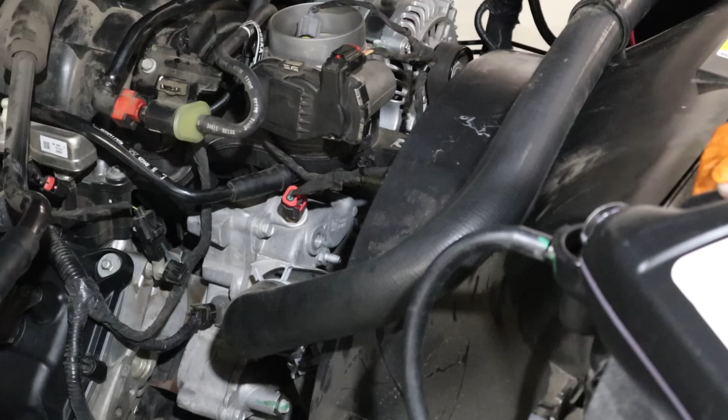Now we're gonna add some coolant. The Hemi engine really has a problem with trying to trap air inside of it, so it can be a little tricky to get this thing to bleed out properly. My recommendation to you is there is a plug, an Allen plug, directly on the front of the water pump. Go ahead and undo that plug as you're filling in the coolant until coolant starts pouring out of that plug, and then put the plug back in and top off your coolant from there.

Basically, that's going to give you the best advantage as far as getting the coolant to bleed out of this thing properly. The real key is to get the thermostat to open. As soon as the thermostat opens, then it'll cycle properly. But if you've got a big air pocket in there, a lot of times that won't happen, and it just gets hotter and hotter and hotter. So really, that's your best effort.

Now, of course, what I do at work is I have a vacuum coolant filler. What it does is it puts a vacuum on the entire cooling system, and then it'll suck the coolant into basically every area of the cooling system, so there's no chance for any kind of air pocket to be in there. But I know a lot of you guys at home, you're not going to have that tool, so this is your best choice as far as filling the cooling system.

We've got the truck all back together again. Now we're down to the last 2 things that we're going to do before we fire it up. The first thing is just a quick check that I always like to do when I get something back together, and that is if you have a code reader of some kind, check to see if you have any active codes. What this will do is it'll tell you if you forgot to plug something back in. It's a lot easier to plug it back in now while the engine's cold versus after the engine's been running and it's very hot. So that's the first step I like to do.

Second thing is, because we've installed this new oil pump, we had the oil pan off, we had the oil pickup tube off, there was no oil in there, so now it needs to draw that oil back up into the system. I want to crank the engine over while making sure I'm getting enough oil pressure before I actually fire the engine. So what I like to do is pull the fuse for the fuel pump so we're not getting any fuel pressure, so the engine won't try to actually fire up. I'll just keep cranking it over until I see that oil pressure is coming up to where I want it to be, then I'll put the fuse back in and we'll fire this thing up.